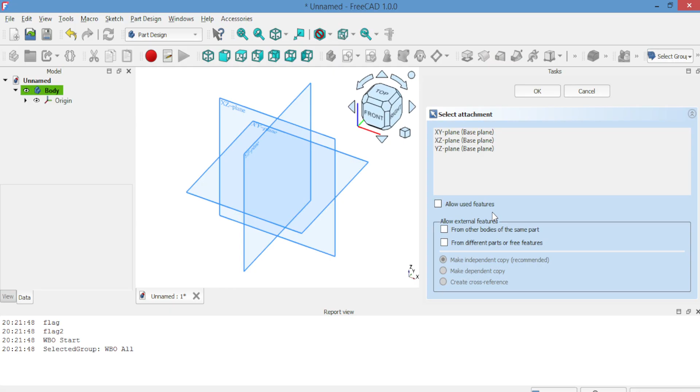Let's get started with a quick overview. Start a new project, create a new body, and select the XY plane.

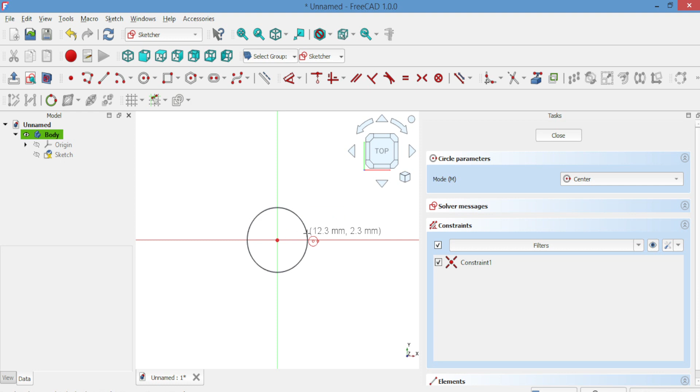Draw two circles with diameters of 25 millimeters and 45 millimeters.

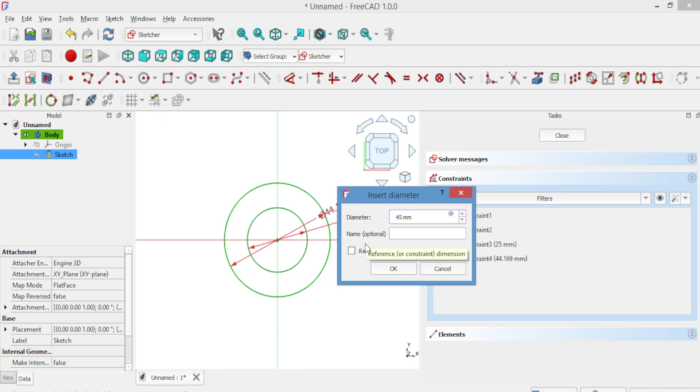Use the Pad tool to extrude the shape and set the height to 16 millimeters.

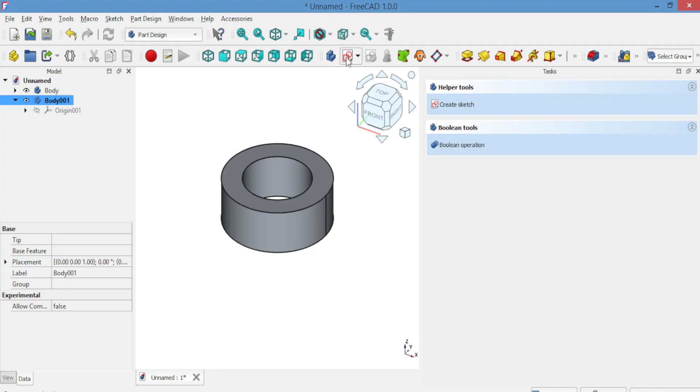Create the arc cut. Create a new body again and select the XY plane. Draw an arc using the center method with a diameter of 2.68 millimeters to form a half circle.

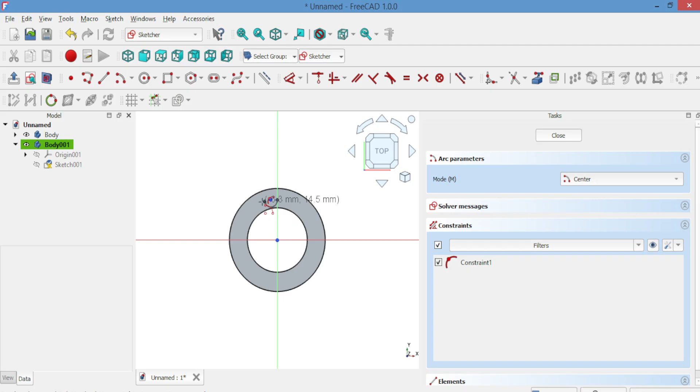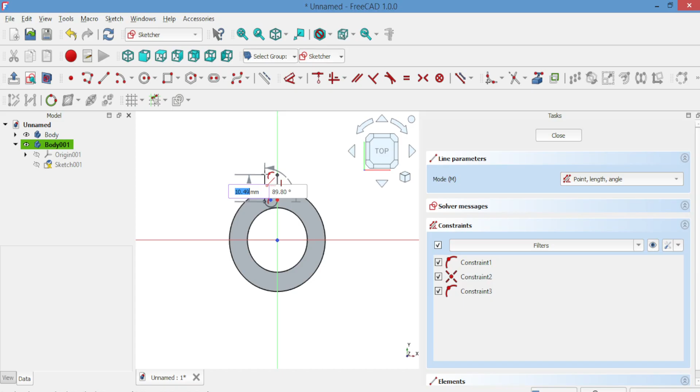Close the wire using a line to complete the sketch. Close the task and click on Pad to extrude it.

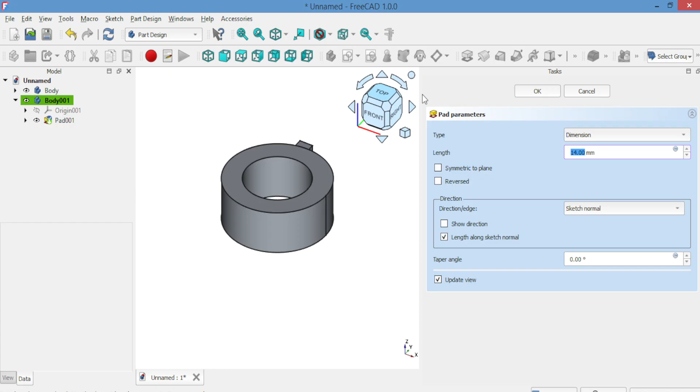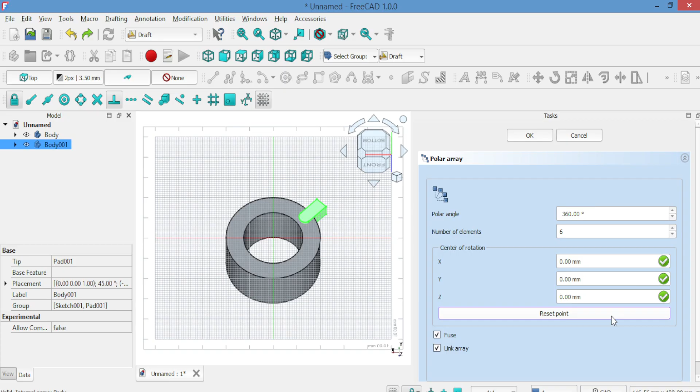Create a circular pattern. Switch to the Draft workbench, select Polar Array, set the number of elements to 6, and reset the base point. Click OK, then cut the array from the base.

Go to the Part workbench, select both the original body and the array, and perform a Boolean cut. Looks great.

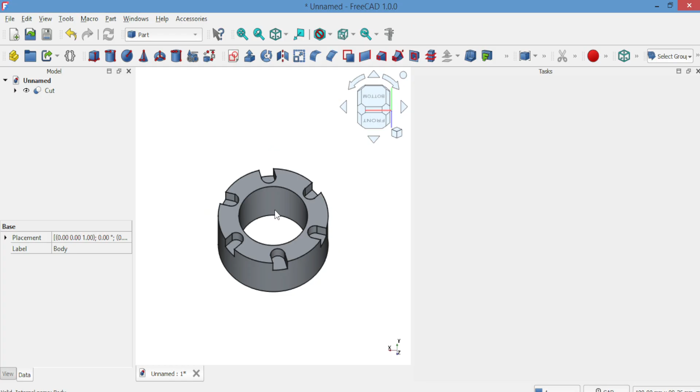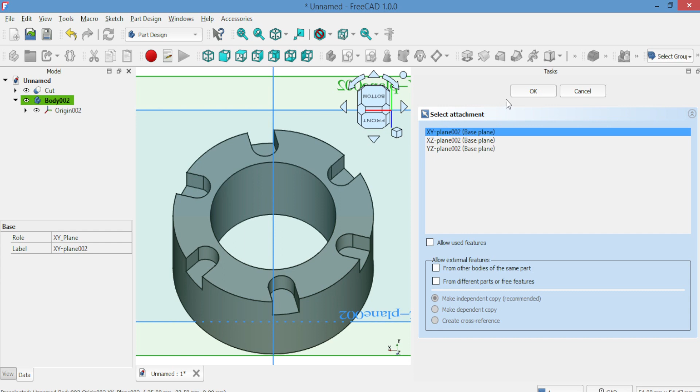Create holes. Create another new body and select the XY plane. Draw a circle with a diameter of 2.47 millimeters.

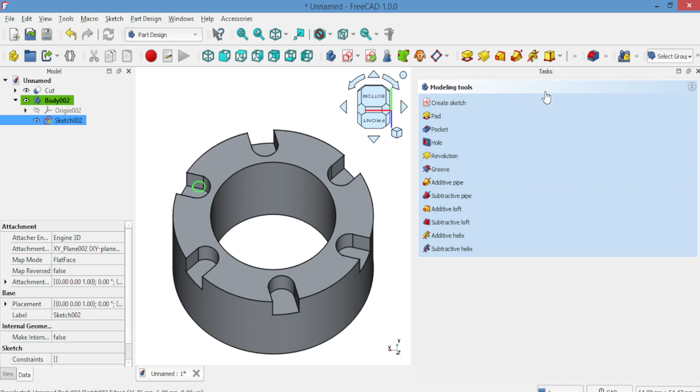Close the task, then use Pad to extrude and adjust the height as needed.

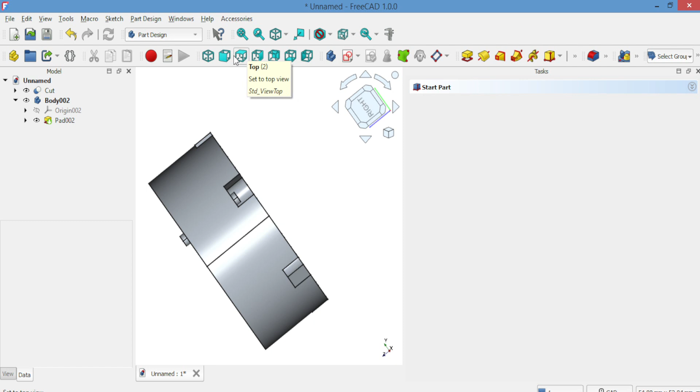Again, go to the Draft workbench. Select Polar Array, set the number of elements to 6, and reset the base point.

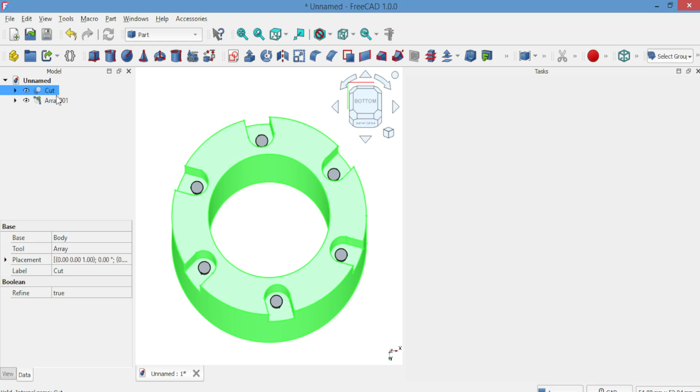Final cut for holes. In the Part workbench, select the cut body and the new body, then use Boolean cut again.

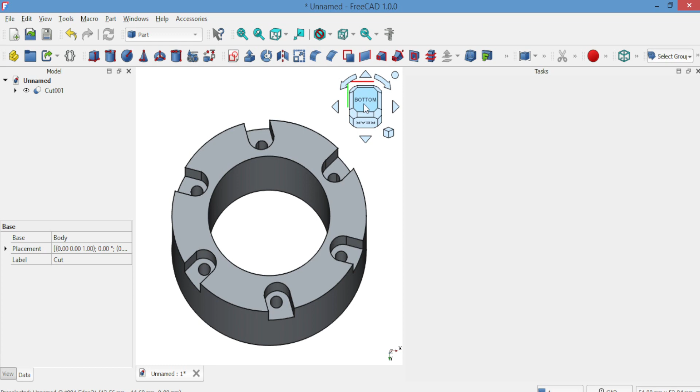Create a step inside the circle. Create a new body and select the XY plane.

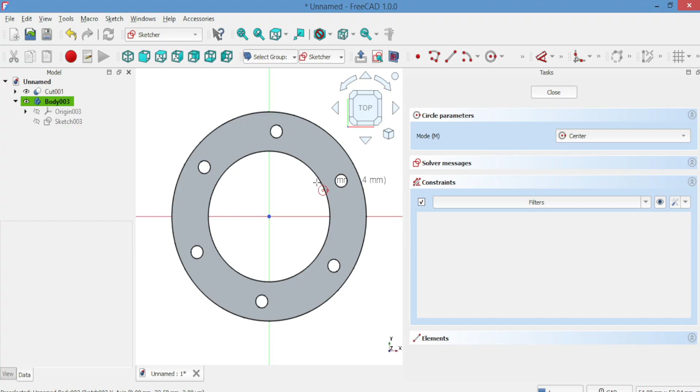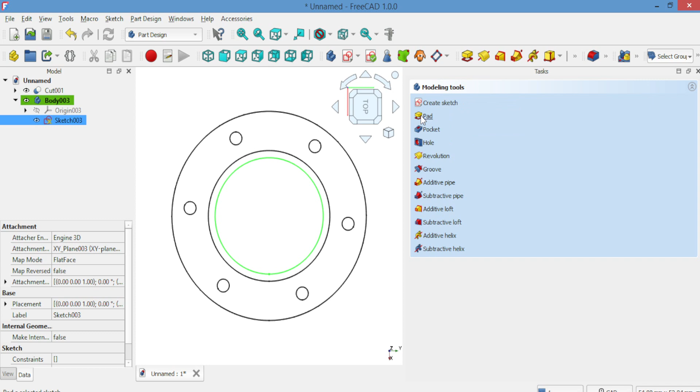Draw two concentric circles as shown. Use Pad to extrude and set the height to 16 millimeters.

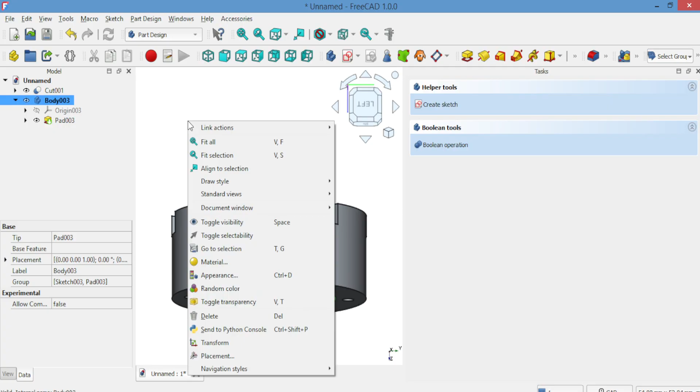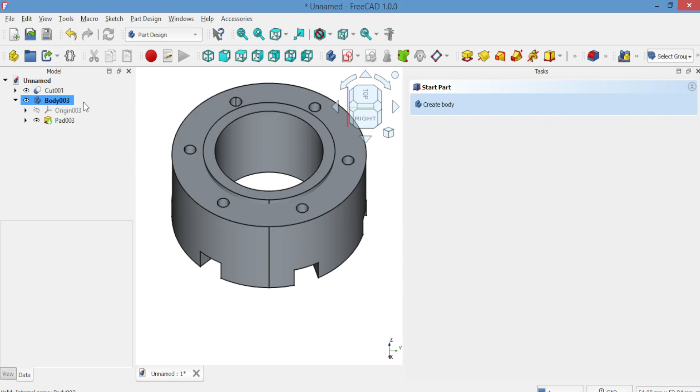Transform the part to position it as needed. Select the previous cut body and the new body, then perform another Boolean cut in the Part workbench.

And that's it. Now you can see the step inside the circular cut.